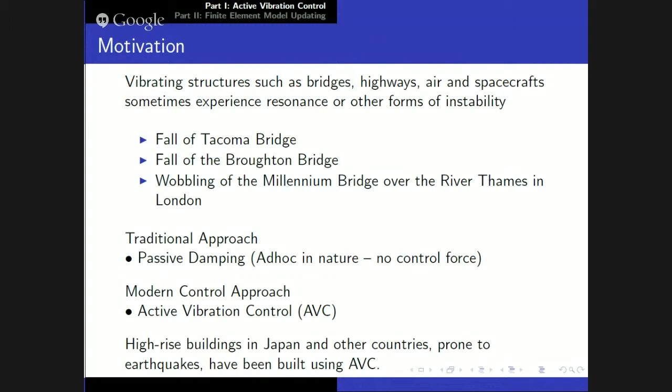So let me tell you now, the first part of my talk is centered on that part, how to do that. Now, vibrating structures are distributed parameter systems, meaning that the real mathematical model is a set of nonlinear partial differential equations with boundary conditions on some Hilbert spaces. So these are all theoretical.

In practice, such systems are discretized into a finite element model by using finite element techniques, giving second order differential equations of this form. The engineers call it a finite element model because this model is generated by finite element techniques. In this equation, M stands for mass, C stands for damping, and K stands for stiffness. These are three matrices, each n by n, and x double dot t, x dot t, x t are respectively the acceleration, velocity, and displacement.

Now, the dynamics of this type of system are governed by the eigenvalues and eigenvectors, which in engineering literature are called the natural frequencies and the mode shapes, of a special type of eigenvalue problem called the quadratic eigenvalue problem.

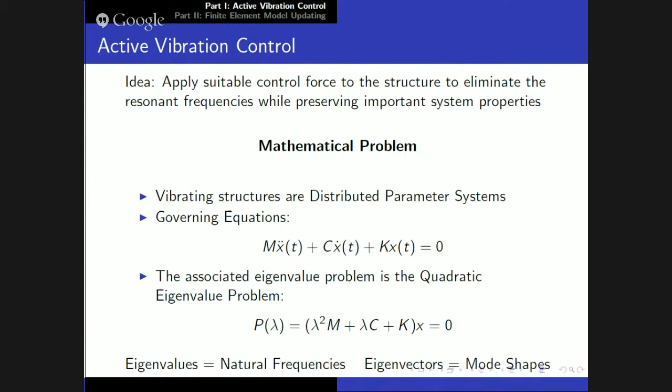Now, as I said, this problem is not very widely discussed in the literature because this problem is a quadratic problem, it's difficult to solve. Now, if M, C, and K are n by n, and M is a non-singular matrix, then the pencil P lambda has 2n eigenvalues and 2n eigenvectors. As I said, it's very difficult to solve numerically, impossible to compute all the eigenvalues and eigenvectors if the problem is large and sparse, because of the non-linear nature of the problem. Okay. Well, I'll come to that later.

Theoretically, you can always convert the quadratic problem to a standard eigenvalue problem of a 2n by 2n matrix. But this is in theory. In practice, if you do that, you lose all the structures of the problem. The matrices M, C, and K in practice have some very special structures. They are symmetric. M is positive definite, K is positive semi-definite. They are banded, sparse. All this nice structure which should be exploited in a computational setting will be completely destroyed if you do that. So the challenge is to solve the problem in the quadratic setting itself, and that's where the difficulty comes.

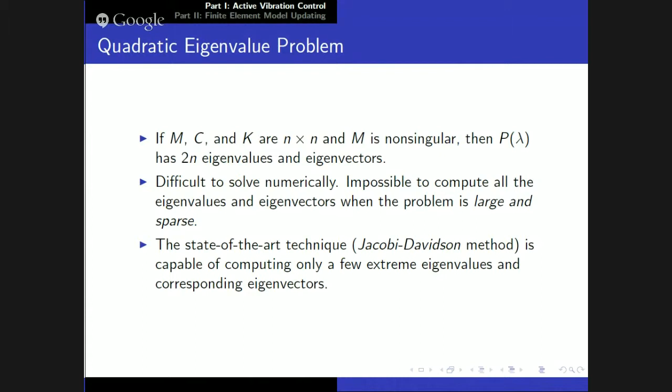As I said, this problem is not very well discussed in the literature. In fact, there are quite a few numerical linear algebra books now. None of the books talks about this problem because it's not much known. But because of my own interest, I put 2 chapters in my own book, Numerical Linear Algebra and Applications. The second edition was published by SIAM in 2010. And there is a review paper by Tisseur and Meerbergen. It's a good survey of that problem.

Okay, let me now come to the control part. Now, suppose you apply a force to the structure of the form B u(t), where B is a fixed matrix called the control matrix. You don't have to know much control theory. And u(t) is called the control vector. Control vector is something at your disposal. You can freely choose that vector. That's called the control vector.

You can control it. Okay, so suppose we decide to choose that vector u(t) in the form u(t) = F x'(t) + G x(t), where F and G are two unknown matrices. They are called feedback control matrices.

Now, with this choice of u(t), if we just substitute that u(t) in this equation, what you get after substitution, I'm sorry, there's a typo here. Just forget about this lambda square. There is no lambda square here. So you get what is called the closed loop system. Now again, the dynamics of these closed loop systems are governed by the eigenvalues and eigenvectors of this closed loop quadratic matrix pencil. In these pencils, everything is known except F and G, because B is the control matrix given to you. F and G are unknown.

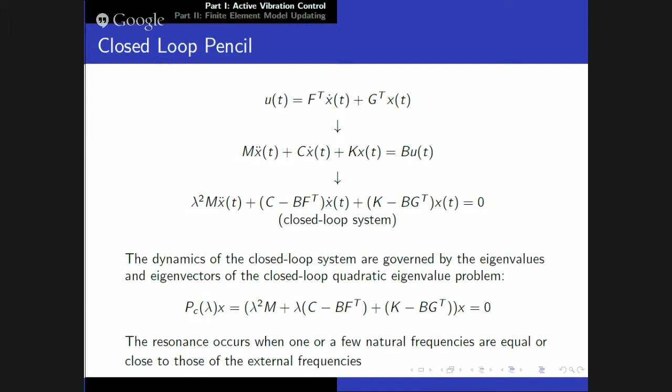Okay, so mathematically, the problem will be something like this: find the feedback matrices F and G such that the few resonant eigenvalues, call them lambda 1 through lambda p, where p is much less than 2n, a small number of eigenvalues. So let me tell you what p is. The state of the art is p is 20. No matter how big the structure is, even the companies who try to solve this problem, NASA, Boeing, they all work with the first 20 eigenvalues or so.

So the first p eigenvalues are replaced by suitably chosen ones, say mu 1 through mu p, while the remaining 2n minus p eigenvalues and eigenvectors remain unchanged. This last phenomenon is called the no spillover phenomenon in engineering literature. So this is the mathematical problem. Okay. So the problem is how to solve such a problem. Of course, all numerical solutions are approximate solutions.

They can be different, they can be a little perturbed. Yeah, you are right. They can be a little perturbed. In any eigenvalue computation, you always have some perturbations. That's why I'm coming to that topic. You have a very good question, because you have to do it in such a way that the eigenvalues of the closed loop pencil do not get perturbed very much. That's a very important property to be kept. I'm coming to that. That is a very good question, actually.

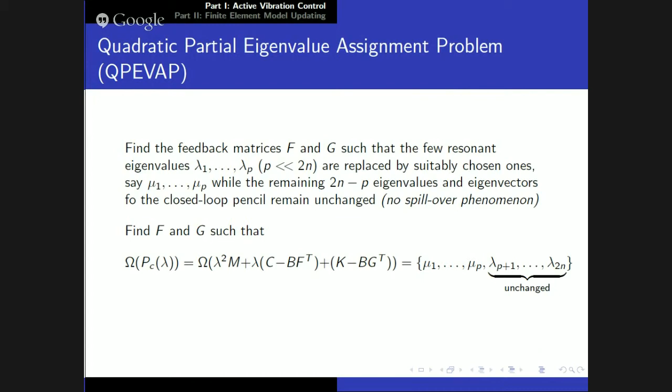Now, this is the basic problem, how to find F and G, that this will happen. However, in practice, we like to have some more properties from F and G. Any F and G will not be a good one. The practical properties you like to see are that they have norms as small as possible. Why? Because small norms mean less energy. That results in something called economic design.

And most importantly, as he was pointing out, you like to construct the F and G, compute the F and G, in such a way that the closed loop eigenvalues, after you do everything, will be as insensitive as possible to small perturbations of the data.

This is called the robust property, because you don't want to do too much perturbation so eigenvalues get perturbed. So this is the most important part. The F and G should be computed in such a way that they have norms as small as possible, and the eigenvalues of the closed loop pencil will be as insensitive as possible to small perturbations of the data, because eigenvalues are known to be very, very ill-conditioned in practice. Small perturbation of data can cause big changes in the eigenvalues. You don't want to do that.

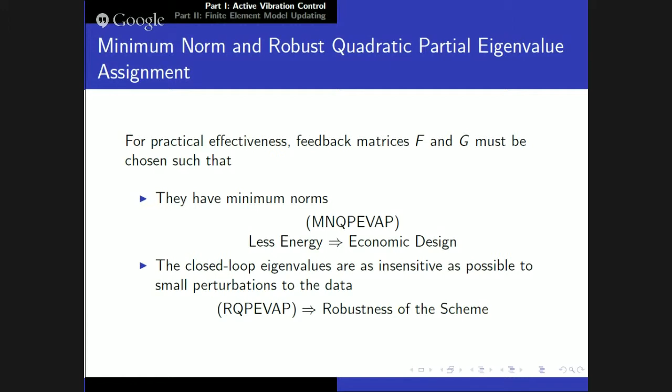So how do you solve such a problem? The standard thing to do, as I said before, is that you have a quadratic control problem. Like an eigenvalue problem, you transform it to a first order state-space system problem, X dot equals AX plus BU, the typical control system. Now if you do that, the problem is that, again, you will lose all the structures of the matrices M, C, and K.

But if you can do that, of course it's very easy. Everything becomes very, very good, because there are beautiful, excellent numerical techniques to solve the first order problem of this type. We call it in control theory the pole assignment problem, or partial pole assignment problem. There are beautiful techniques to solve this. It's a classical problem for first order systems.

And in fact, I have a control book, as you were mentioning, and I have two chapters devoted to that problem. But as I said, because of the computational and practical difficulties, the problem should not be solved by transforming it to a first order problem. It will be solved in the quadratic setting itself.

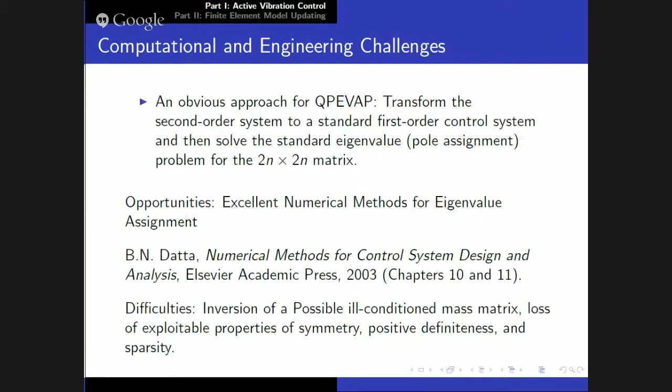Oh, what am I doing? I'm going back. Why? Okay, so let me tell you.

Let me first show you a solution to the basic problem. I'm not talking about the optimization part yet, just a solution to the basic problem: how to compute F and G such that a small number of eigenvalues which are identified as bad ones will be replaced by suitably chosen good ones, and the remaining large number of eigenvalues and eigenvectors will remain unchanged.

The problem would be solved computationally in second order setting itself, in quadratic setting itself, by knowing only the few eigenvalues and eigenvectors that need to be replaced. That's it. And the algorithm, as you can see, will be a really fast algorithm because computation requirement is minimum.

Okay, so the solution comes in two parts. The first part is the no-spillover part, meaning to guarantee that the large number of eigenvalues and eigenvectors will remain unchanged. That part is the most difficult part to have, and that part you have to prove some mathematical result to demonstrate.

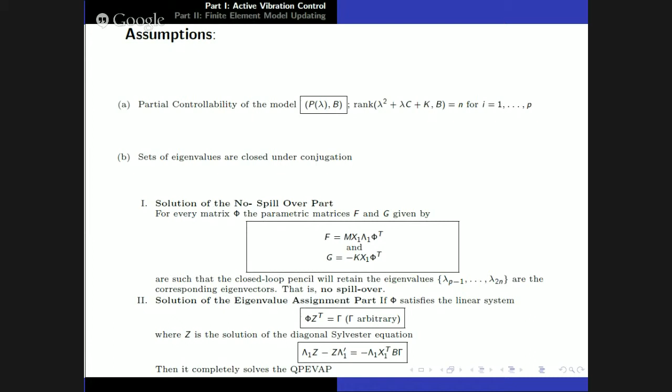The first part of the problem, there's an interesting thing: the robustness part, that second part, minimizing the condition number of the eigenvector matrix, the insensitivity of the closed loop eigenvalues, amounts to minimizing the condition number of the eigenvector matrix.

Now, this part I gave to a student of mine, and he banged his head, could not solve the original problem. So he came up with an idea. He said, okay, I cannot solve the problem, I cannot find the right Y. Y means the eigenvector matrix, the closed loop eigenvector matrix. What I can do is compute an eigenvector matrix such that Y is as close as possible to an orthogonal matrix.

That means the Frobenius norm of I minus Y Hermitian Y squared will be as small as possible. The reason he said that is an orthogonal matrix is known to be very well conditioned, the condition number is 1. So if you can have a matrix which is as close as possible to an orthogonal matrix, probably that matrix should be very insensitive to perturbations. I mean, the eigenvalues will be insensitive to perturbations, so that matrix should have a small condition number. That was the idea. It's a heuristic idea.

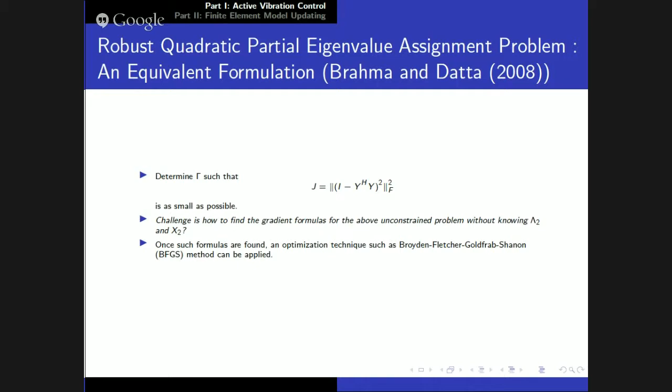Okay, and then we tried to combine these two problems into one problem. So that means we now have one objective function for both problems.

As you can see, the first one -- I forgot to tell you -- minimizing the condition number of the eigenvector matrix Y is mathematically equivalent to minimizing the square of the Frobenius norm plus the Frobenius norm of the inverse of Y. These two things are mathematically equivalent. So the first part of this objective function corresponds to the robustness part, minimizing the condition number, and the second part corresponds to the norm minimization.

And alpha is a parameter between 0 and 1. So if alpha is 1, then we have the robust problem. If alpha is 0, then we have the other problem. So it's a combination: alpha equals 0 is norm minimization, alpha equals 1 is the condition number minimization problem.

So the problem is an unconstrained nonlinear optimization problem. Okay, and it's non-convex also, right? So the problem is how to solve such a hard problem.

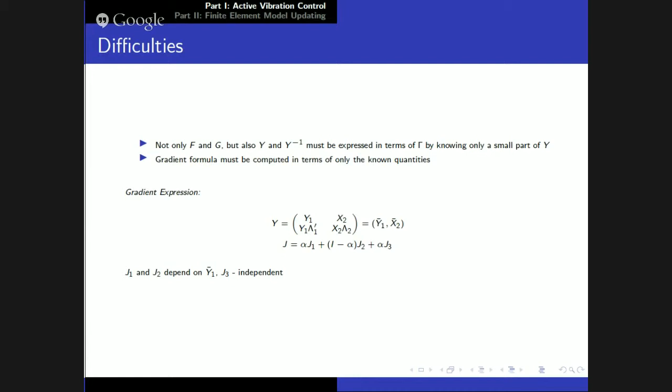And where J1 and J2 will depend on the first part, the known part, and J3 will be independent. So that part can be neglected for computing the gradient formula. Okay, and after a lot of hard mathematical manipulations, we were able to show that the gradient formula can be computed, assuming, I should be honest, assuming some part of the unknown is known to us.

So we need to know, actually, we need an a priori estimate of the upper bound of the reciprocal of the smallest singular values of X2 tilde, the second part. Okay, so if you happen to know that somehow, then you can compute the gradient formula. That's what we were able to prove. Okay, it's quite involved.

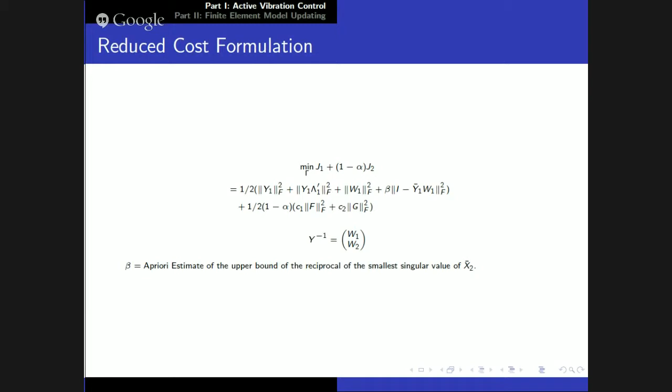So we had that, we computed... 5 more minutes? 10 more minutes. Okay, I'm okay. Yeah, I wish I could spend some more time here, but there is already next time, right? Yep. Right, next time. Sure. Okay.

I tell you something. I used to be a consultant of Boeing company, but then I had to split from them because they are so secretive of what they do. You know, they did not even trust me with the data, and they were using my algorithms without telling me what they're doing. So I just divorced them. But I have some good friends at NASA, so I got some data. Not real life data, they don't give me real data. Simulated data.